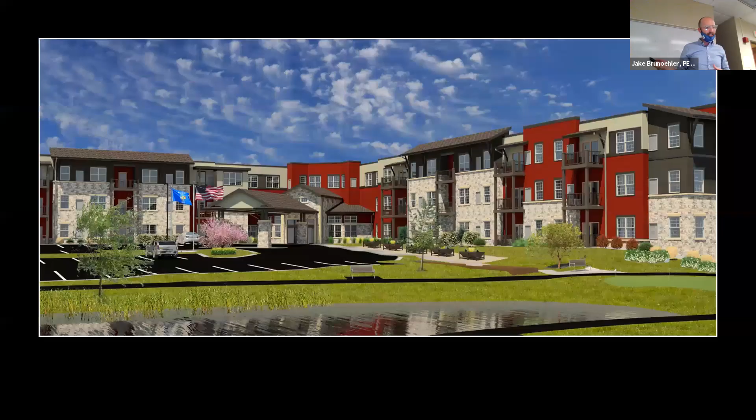So he's all about blue mind, the benefits of being in or on water. And so that's where the blue marble comes from. So for those who are interested in stormwater or environmental engineering, or just an interesting read, I do recommend his book called Blue Mind. In that story, he accurately describes all the physical, ecological, economic, cognitive, emotional, psychological, and social benefits of healthy oceans and waterways.

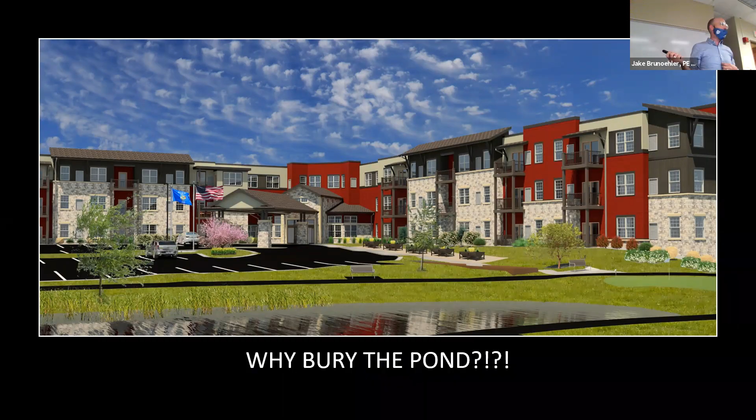And so if there's such a direct correlation between our personal and societal well-being and being on or near water, why would we ever want to bury the pond? It just doesn't make sense, right? And so we're going to go through the why real quick. As I always say, when we start with why, I'll say safety first. So that's where we'll start.

As I said, I work predominantly on subsurface stormwater management. So everything I do gets buried. And a very large number of projects that I work on, say schools and things like that, might actually have the space for a surface pond, for stormwater to be stored at the surface, but due to the potential for someone to get into that pond and find harm, they, and likely their insurance carrier, are not interested in having the pond at the surface on their property.

Schools, childcare facilities, senior and memory care facilities. Even now I hear discussions from neighborhood associations that have concern over how much liability is shared by the residents who all send their runoff into a regional pond in that neighborhood. Is a sign enough to protect yourself from the liability of someone finding harm in that pond? Do you have to fence it like a pool? How big of a fence? And does it need to be lit at night?

I myself, and probably all of you that have any education in stormwater, am pretty grossed out about the thought of swimming in a stormwater pond. Like, ugh, gross. But I know with my toddler, he turns 2 next month, if he had wandered away out of my house to a pond, unless he is physically incapable of getting to the water's edge, he's going in. He's going to investigate. And so that just scares the living daylights out of me.

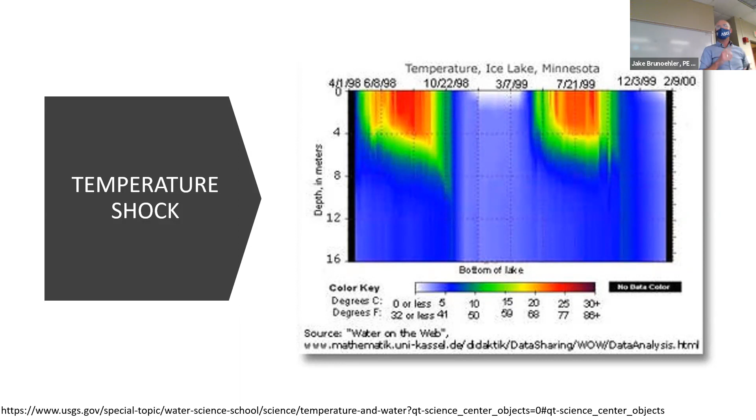In natural environments, temperature is really not too much of a concern, as those aquatic species have evolved to exist in those natural water bodies. It's when the temperature of that water body changes, either by a natural event or by human activity, that those fish start to break out in a sweat and get a little bit worried.

So our ponds, let's see, oh, there we go. There's a photo of a nice steamy parking lot right after a summer rain. Our ponds are meant to accept, store, and treat rain as it comes off parking lots just like this. So rain falls on a parking lot that's been baking in the sun all day.

And for those who have tested asphalt, like I did through college, you can put your hand on asphalt up to about 125 degrees. And if you can't put your hand on it, you're north of 125 degrees. Anything that lands on that parking lot surface, that's hot.

And so the water that falls on that parking lot gets superheated and then runs off into our ponds and streams. And if that water is not returned to a more normal temperature prior to entering natural downstream systems, that water can be a pretty severe shock to those aquatic life species.

So taking that water underground first, even just temporarily, into an uninhabited place where animals aren't living, a spot where they are not currently taking up residence, to allow it to cool off away from that flora and fauna can really significantly mitigate the risk of the heat shock.

And then next on our list of reasons: I'm certainly not a real estate expert. When it came to purchasing a home, I let my wife drive that, so she's more of the specialist on that. But I think everyone has heard of the three most important things in real estate. It's location, location, and then location.

The pictured example on the screen is of the church that I attended when I lived in Milwaukee, right here at the corner of First and North. St. Marcus Lutheran Church has been an incredibly successful school right in the Brewers Hill and Harambee neighborhoods. And if you ever look it up, those are some pretty gnarly neighborhoods as far as the statistics you might look into for neighborhood metrics. It's not the prettiest of pictures, but through serious commitment and dedication, this school has continued to grow.

As part of that, they've been doing campus expansions, just like Platteville's doing a big giant expansion I got to tour last week. Awesome projects. St. Marcus was doing the same thing back in 2010. The school was on the doorstep of breaking ground when the local city governing authority came in and said, if you continue to build this, you have to install some sort of stormwater management. You cannot continue to ride this grandfathered train without making some sort of change to your stormwater management. They were basically just sending it right into the combined sewers.

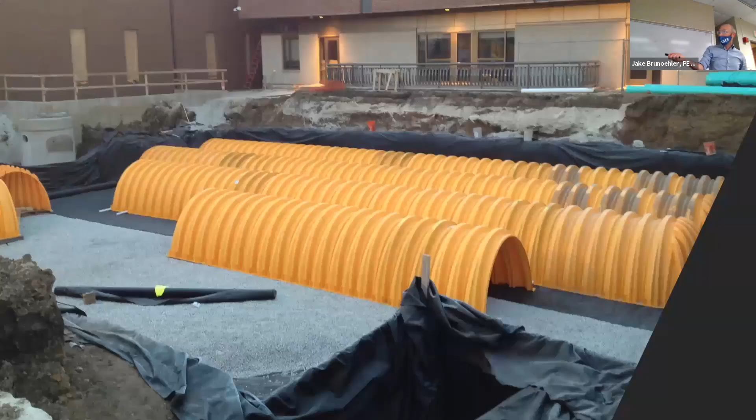After a few quick calculations, it became clear that the portion you see here on the screen, which is a very nice playground, would either have to be a surface pond, or they would have to bury their stormwater under this playground. Everywhere else on that property is built, and there was no room left. Even though it was well before my time with ADS, I was able to track down construction photos. Right here, that is the stormwater system buried underneath, about halfway built. Those are the stormwater chambers that I work with now. So it looks like this now, and that's what it looked like while it was being built.

So they weren't really given much of a choice: bury their pond, move to a different facility, or limit their enrollment, which to this day is still perpetually on a waiting list. They weren't left with much of a choice. So all that stormwater got buried under their playground.

And one of the more favorable items about many of these buried systems is that many of them are made with post-consumer plastics. Both my products, and several other ones out there. Anytime you can increase demand for those post-consumer plastics, as demand goes up, the price will follow, right along those economic principles, if you take macroeconomics as part of your curriculum.

No. Yeah, we took it at Valpo. I'm not sure it's a great class. I barely use it now.

Anyway, this massive demand increases the potential revenue to those municipalities that institute recycling programs. As the programs are better funded, they get better at their job, which increases the quality and efficiency to keep those plastics out of landfills. There's this myth out there you've maybe heard: oh man, nobody buys those plastics anyway, it all just goes to the landfill.

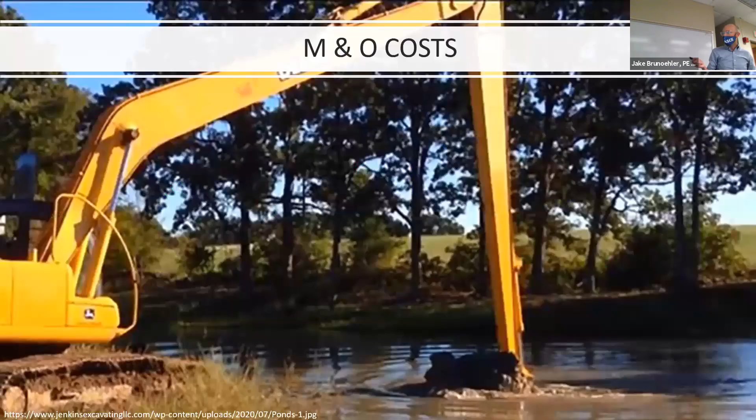There we go. The next one is a trend that's starting to pop up in the early adopter states with more robust stormwater programs. That photo right there was taken in Minnesota. So the reason we do stormwater at kind of a micro level, you've all heard of the Clean Water Act, I assume. The state of Wisconsin is mandated by the Clean Water Act from the feds, from the EPA, to institute stormwater programs to clean up our rivers and streams.

As part of that, about 30 years ago, Minnesota was one of the first early adopters of the Clean Water Act. Minnesota has some of the oldest ponds in the country. And many of these ponds have long since reached their maintenance cycle, where 30 years is about the life cycle of a pond that's been designed properly. And as they reach their maintenance cycle, they've really ceased to do their job. They're not really functioning anymore.

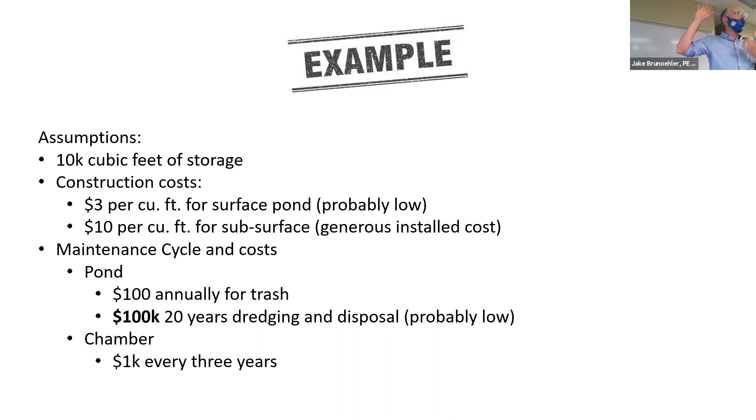So, hold on. Yeah. Any questions up to this point? Let me just pause right there. I went through a lot of information. Stormwater students in the room. Do you declare an emphasis, a focus? Environmental emphasis. Okay, cool. Sweet. Right.

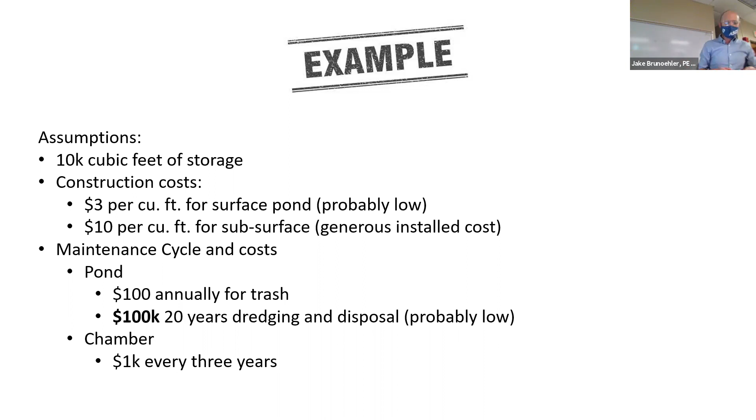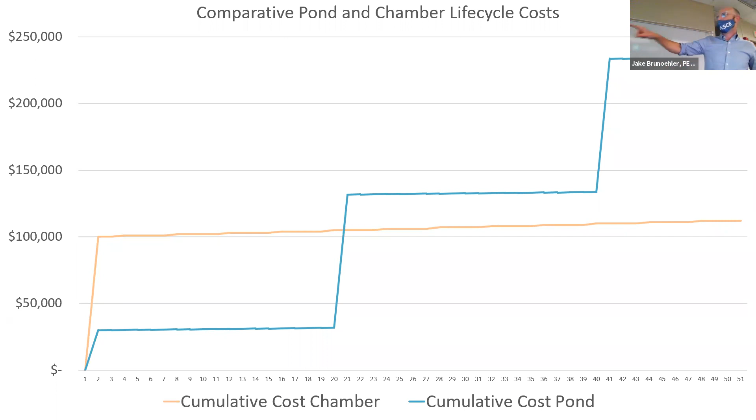So I'll actually go through a quick cost comparison of underground system maintenance versus surface level stormwater pond maintenance. So on your screen, based on the chart, I'm just gonna skip that. It's at this point when we start to transition out of the why. We covered why we might want to bury the pond. Now let's get into how. And depending on whether you're talking with a developer, an engineer, or a regulator that's got oversight, you might be asking yourself, what if I already have it?

What if I'm not quite ready to turn my property into a construction zone yet? I already own my pond. What do I do now? I will say that many municipalities have begun to retrofit some of their ponds with upstream pretreatment. Actually, on my way into the building, there's a catch basin right outside with a coarse settling device built into that manhole. So there's a pollutant removal device right inside the unit, right outside the engineering building.

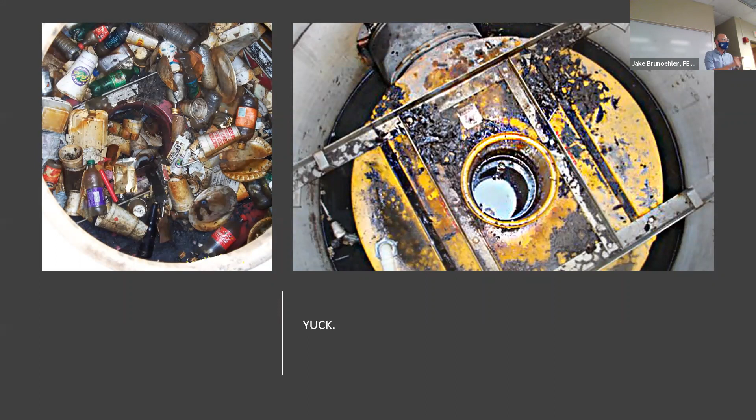So at the last catch basin or manhole prior to a pond, just like the one outside, they install a much more effective water quality unit to keep a lot of that sediment from ever reaching the pond. So it allows you to clean out your manholes and catch basins on a fairly regular basis, and then you get that ounce of prevention versus that pound of cure. These units typically have much easier access for regular scheduled maintenance and cleaning, and much more minor disposal costs without having to do a full pond dewatering.

If you've ever seen how a pond gets cleaned out, they basically empty the entire pond of the water, and they pump all that water through big filter bags. Once all the water's through the filter bag, there's a bunch of dirt left in that bag, and they have to haul all that dirt off, all that sediment, trash, leaves, decaying animals, all kinds of things. So that is a significant cost. So if you can mitigate the number of times that might happen,

The one on your screen is a pre-treatment unit, and it really shows how dirty stormwater is. Stormwater is gross, guys, if you didn't know. We get it in such concentrations we don't realize. This one happens to be from a company called Hydro International, and the model on your screen is called a Downstream Defender. The Downstream Defender is usually in a 4, 6, or 8 foot diameter manhole.

With the inlet and outlet configuration, the water comes in from the outside and enters the manhole so that it starts swirling inside. With the swirling action inside that manhole, the water's in there longer, which allows for more sedimentation, so the sediments can drop out of that water. On top of that, it's got an internal cone that keeps floatables from discharging from the unit as well. So really just a pollutant removal device they can install right in front of the pond. Pre-treatment systems typically target pollutants in the 50 micron range and above.

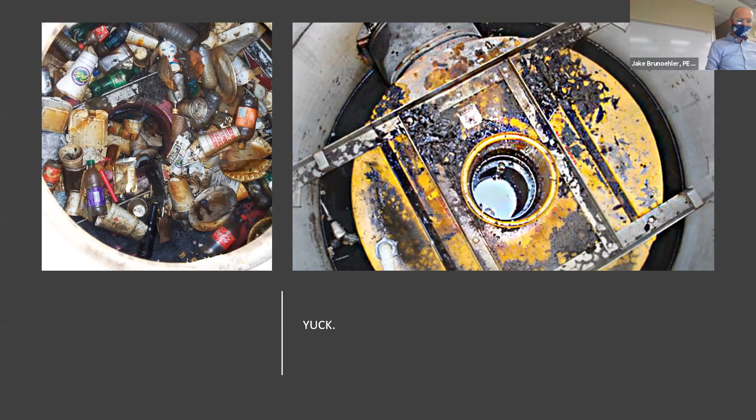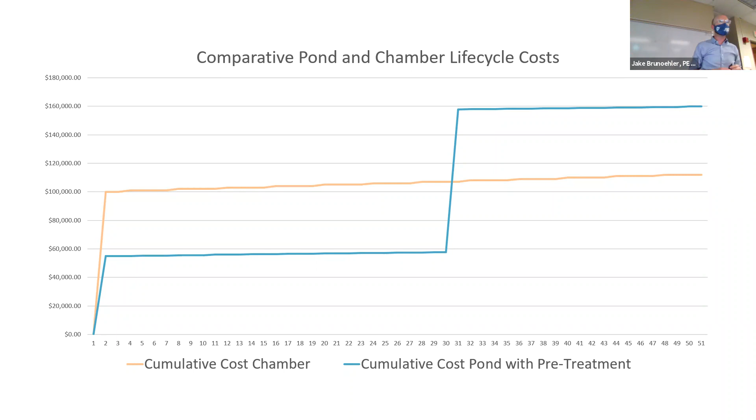So if you're able to add that to your upstream storm sewer costs and eliminate one dredging and disposal, even with regular cleaning costs, the overall savings in the life cycle of a BMP can be pretty significant. Right here, this blue line is the cost of ownership for a pond. Even though nothing's cheaper than digging a hole in the ground and putting water in it, once you have to do it again about 15, 20, 30 years later, suddenly the cost can be pretty significant. You get a lot of initial cost in building that stormwater system, but by the 30-year or 50-year life cycle, those costs have leveled. So just a different way to think about it.

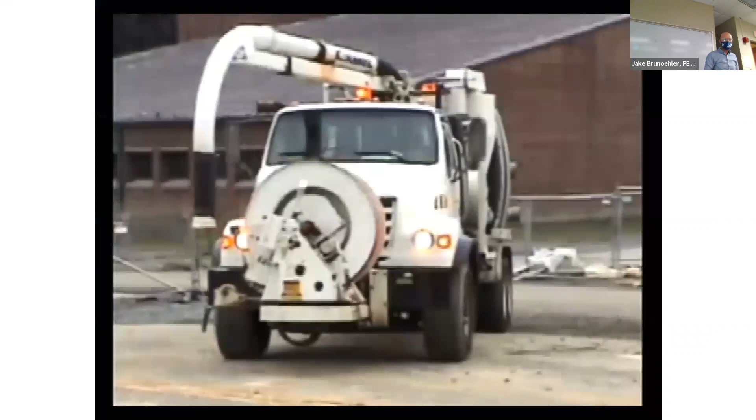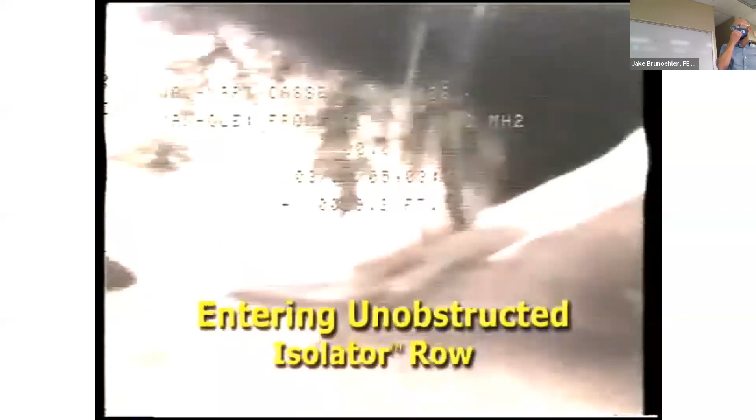While we're on that subject, we'll talk a little bit about what maintenance might look like on an underground system. Once those pollutants are contained within an underground pond, a lot of those get cleaned out with a jet vac process. Forgive me how old this video is. Not a lot of my systems have reached their design life cycle for maintenance, they aren't old enough yet to need to be cleaned, so this is the one that I've got.

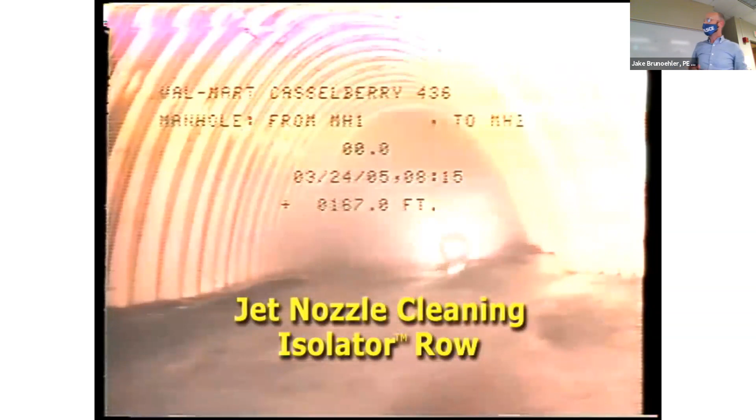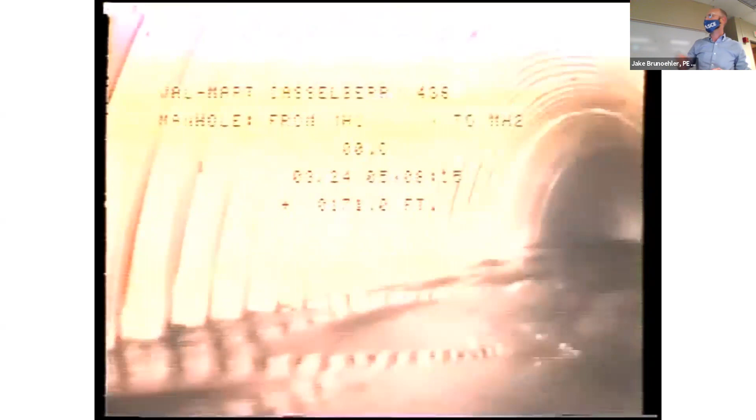As you can see, the jet vac actually goes into a stormwater system. All this sediment's built up on the bottom, and all that gets jetted back to a cleanout structure on the end of that stormwater system. This is an underground stormwater storage and treatment system, and it also promotes infiltration. It's an underground chamber system, just like you saw at that church project. We'll go into some different project examples closer to the end.

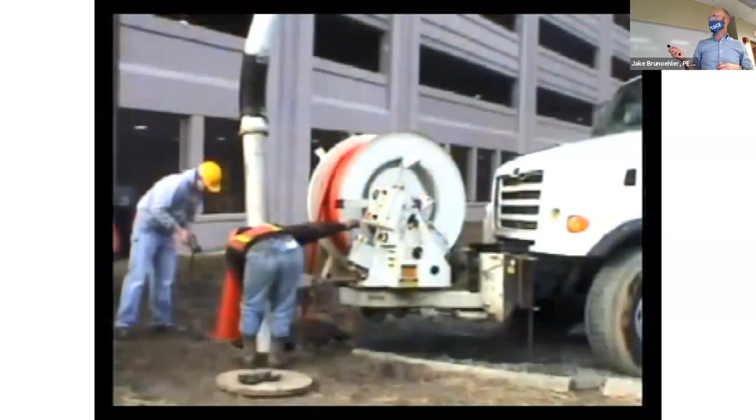And then this right here, also further illustrating how dirty stormwater is. Any construction management students in the room? Any CM students? Right, nice.

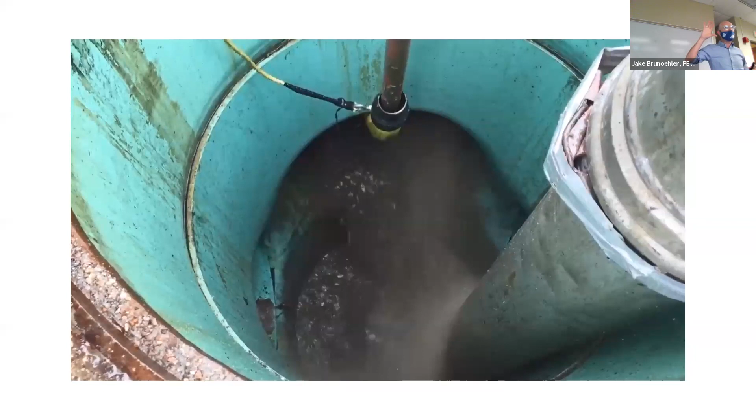So this stormwater system went live. So they basically hooked up all their storm sewer during construction to their post-construction stormwater devices. So during construction, you use like inlet protections, silt fence, all that stuff you see around the engineering building right now for erosion control. They didn't have any of that in. They just sent it to this system. And since this removes sediment, removes pollutants, it did its job, but it also saw about 20 years worth of sediment in about 6 months.

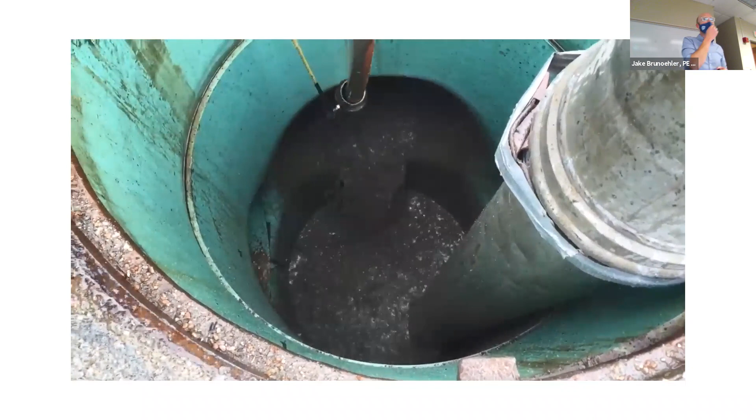I have the 3 classic pillars of sustainability on the screen. You probably have all heard of this, like the whole sustainability. Yeah. So especially with ASCE now coming out with a sustainable design manual, the ASCE, I think it's 144. ASCE 7 is for like structure. Yeah. Anyway, when it comes to the first 2 pillars, most subsurface systems do shine. It makes good environmental sense, makes pretty good economic sense, especially when you consider the cost of real estate.

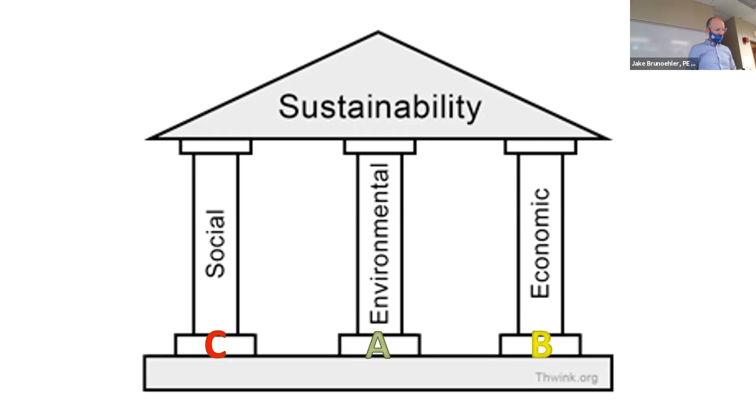Which kind of brings me to my last two parts. A few examples, and then we might go through a couple of designs.

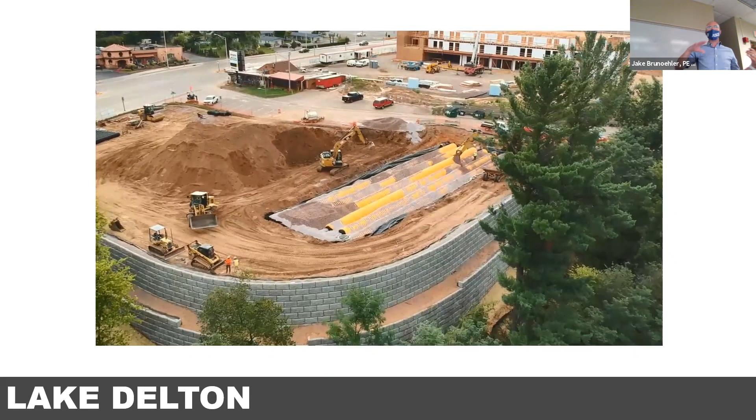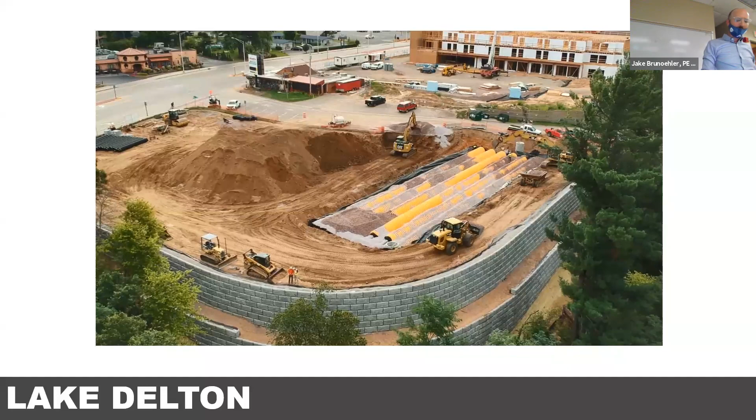But I will take this opportunity to reiterate and disclose that I do have a financial incentive towards buried stormwater systems. Obviously, that's clear. I'm pretty enthusiastic about it myself. I am paid by a manufacturer that produces construction materials for that exact application. So please understand that there are many companies out there that also produce proprietary products that can be used for this application.

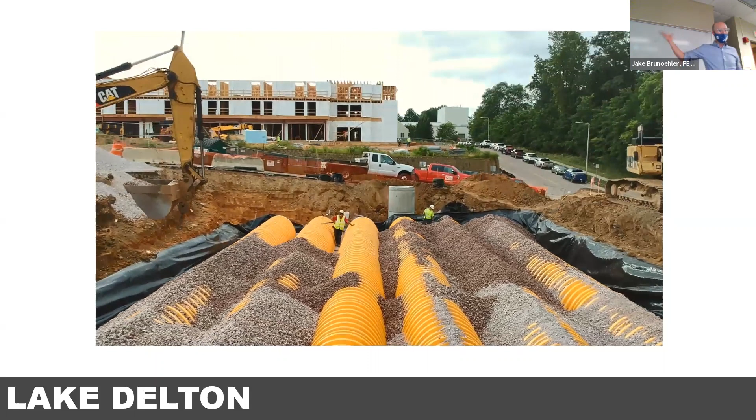The overwhelming majority of underground stormwater systems are proprietary devices, just by nature of what it's trying to do: finding a way to structurally bury your pond under some sort of much more usable infrastructure. Fortunately, most of these systems can be specified with non-proprietary specifications. So when you're writing specifications for, say, public projects that are funded by tax dollars, there are ways that you can specify those proprietary systems with non-proprietary specifications. So it's all about how you write those specs.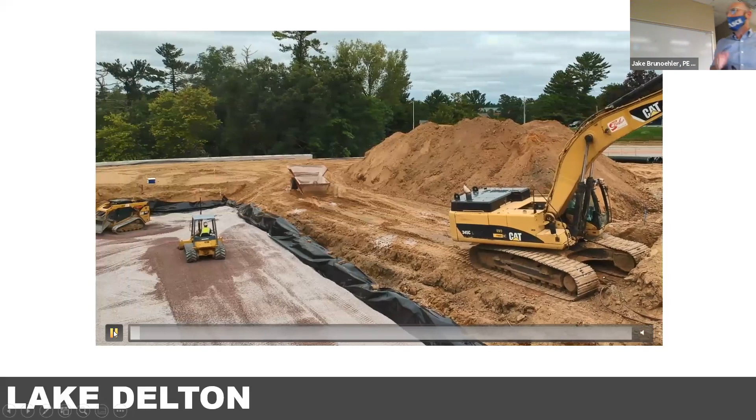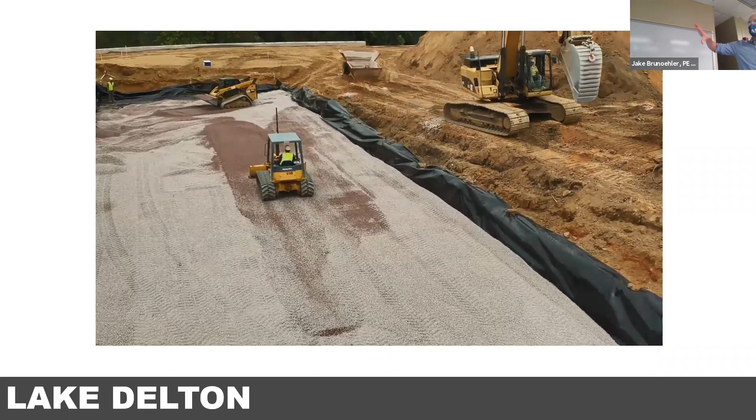So I'm going to play that one more time. This stormwater system is installed at a hotel, right in Lake Delton, a restaurant hotel site where they actually needed stormwater storage for treatment and detention and rate control. So they needed to hold that water back. And so right under their parking lot, and the interesting part about this one, if you see along that left edge, there's a pretty big retaining wall. So storing your stormwater right next to a retaining wall is a pretty bold move too.

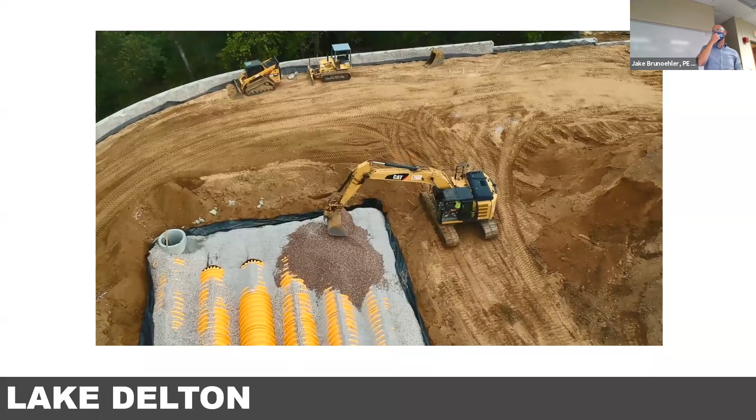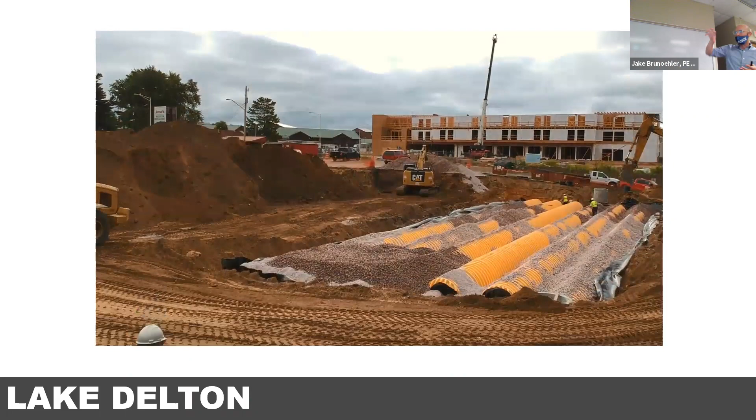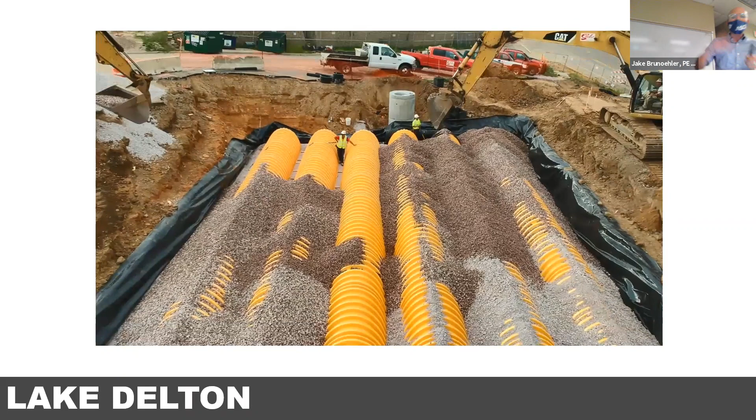So that one actually had a full impermeable liner around the bottom of it, because that stormwater system is open bottom. So we use the storage in the rock as well as the storage inside that underground chamber for that StormTech system. So we had to do a full impermeable liner on that to mitigate risk to the retaining wall. Neat project, and construction always looks better from a drone than it does from down at the surface.

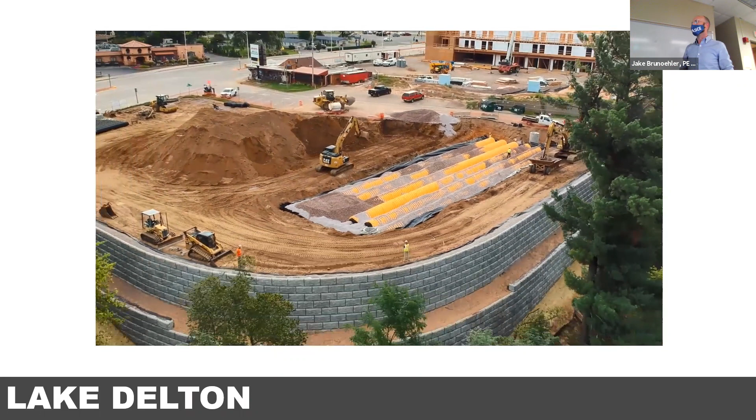It also helped that the contractor was really clean and really professional. So I'll give a shout out to that contractor as well.

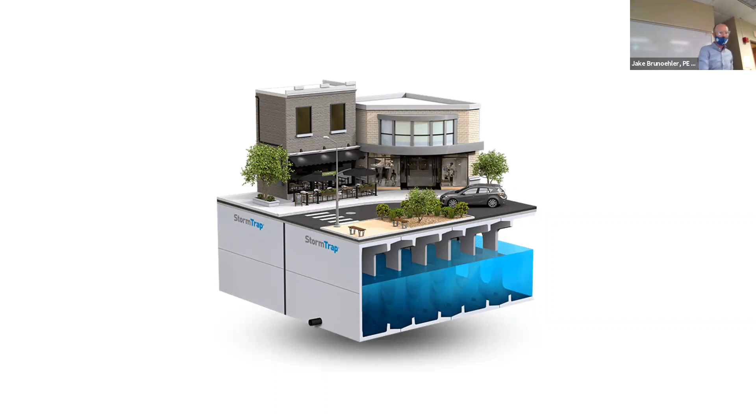As I say, there are some good stormwater systems out there. There are some not so good ones. The one pictured right here is called StormTrap. The one that I work with is called StormTech. I know, not confusing at all. StormTech is from ADS. It's an underground thermoplastic chamber system. StormTrap, as you can see on your screen, is actually made of precast concrete. It's basically like building a basement, and then you can send stormwater.

Concrete vaults with modular systems that can be configured to meet some of the most challenging urban projects. We see a lot of this product line down in Chicago, because a lot of times you're not really supposed to put stormwater systems under the footprint of a building with permanent occupancy. So if there's residential units, they're not really supposed to put it directly under that. So they try and find a spot, say in parking lots or parks or playgrounds, where they can put those stormwater systems. But it just kind of looks wild, right? Like someone messed up and flooded their basement is what this looks like.

So StormTrap's a good product. I know their local Midwestern rep really well, and that's a good friend of mine. So he and I get along real well.

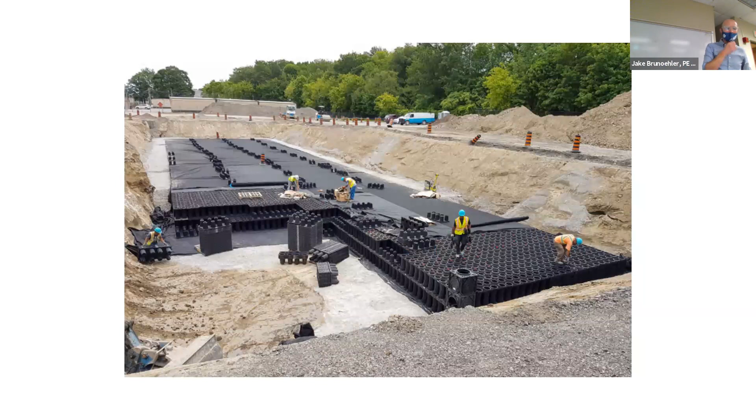Another system that we see a lot of, depending on what part of the country you're located in, is often referred to as a crate system. I believe it's due to their similar look to an actual milk crate. So right there, going after the hearts and minds of the dairy state with milk crates. These modular interlocking crates are typically made of high density polyethylene, just like a lot of the products that my company works with, which is again a benefit. They can use recycled thermoplastics to provide storage volume needed to meet those detention requirements as part of their stormwater.

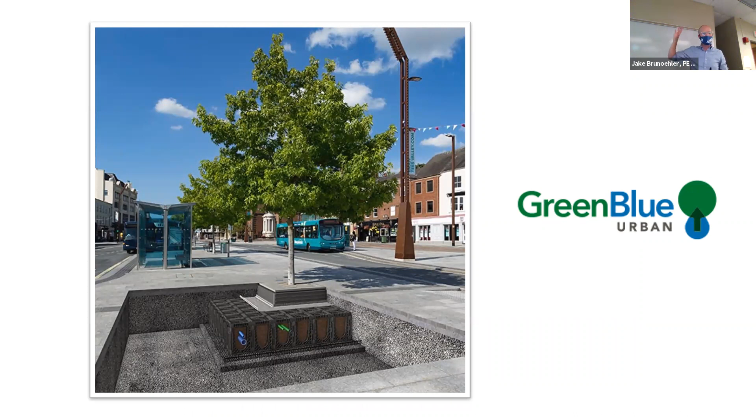And one of the more interesting ones that's popped up on occasion, just starting to get some momentum, is projects all over the country from a company called GreenBlue. Most urban trees, the trees that you see planted in downtown areas, are planted in a box that's maybe 5-6 feet square, which is really like a little tree coffin, where that tree is going to grow and provide this really nice canopy, but it's going to be root bound in maybe a decade. And at that point, it's going to just limp through and probably die.

And so GreenBlue has developed a structurally viable way to create space for a much larger and more healthy root ball without risking major damage to the surrounding infrastructure. So right in the middle of your downtown streets, they've created a crate system that allows for loose soils under the road, which then gives room for those root balls to expand.

At that point, the amount of benefits from a tree versus, say, green infrastructure with small shrubs, small shrubs that you see in a rain garden or a biofilter. Trees are workhorses. You get stormwater uptake through the root systems, you get evapotranspiration from the water that's on the leaves, you get CO2 usage in much greater quantities. And there's probably more that I'm forgetting.

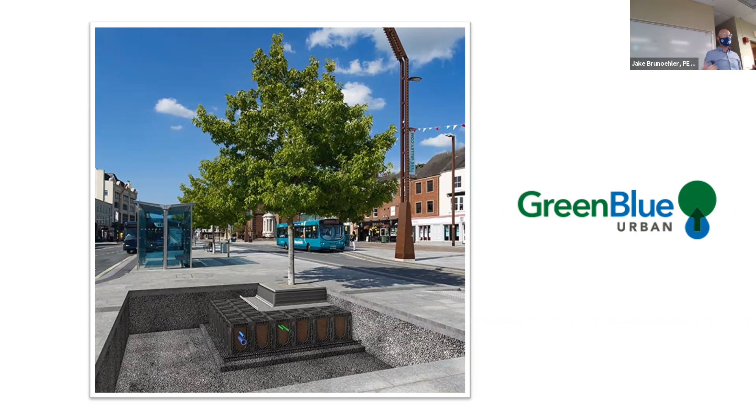But a really neat product that my company doesn't do. So with good autumn leaf management, especially as the leaves fall, you don't want those leaves to then create a concentrated phosphorus load downstream. I can't imagine how these devices won't do good things in dense urban settings. So it mitigates temperature, you get a cooler downtown because you're in the shade. There's just a neat product. I enjoy talking about some of the ones that are more exciting.

Many times these and other underground systems do require a lot of ancillary treatment. So there's really neat ways that you can combine all sorts of systems together in order to provide more sedimentation in a treatment train approach. So the water quality provided by the energy dissipation from permeable paver systems, which causes those pollutants to settle out, can be matched with all kinds of options, each with their different costs and associated performance.

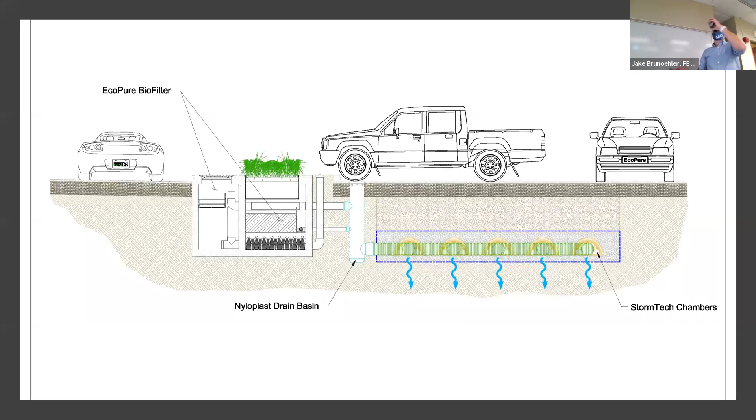And then I've also had the opportunity and the fun experience of working with permeable paver manufacturers from companies like Pave Drain, where they take permeable paver blocks and we'll actually use those as how water gets into our StormTech chamber system. So underground chamber systems with a permeable paver block at the top, at that point you don't need storm sewer to get into the system. It mitigates a lot of costs that way, but you also get the pre-treatment and some of the flow attenuation from the permeable paver blocks at the surface.

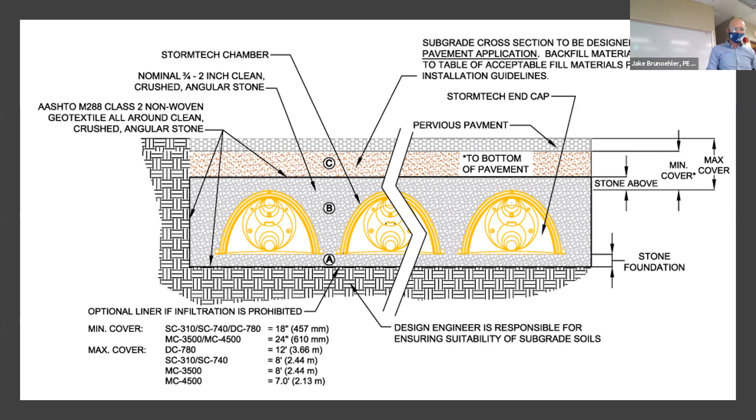So neat design methodologies, and why we all kind of have to get along together as manufacturers, because we might only have a portion of the project that comes from our employers. So we kind of have to partner with our competitors all the time. So, yeah, and same with combination systems with bioretention, biofiltration, more of your classic green infrastructure. So this example on your screen there, you see right here.

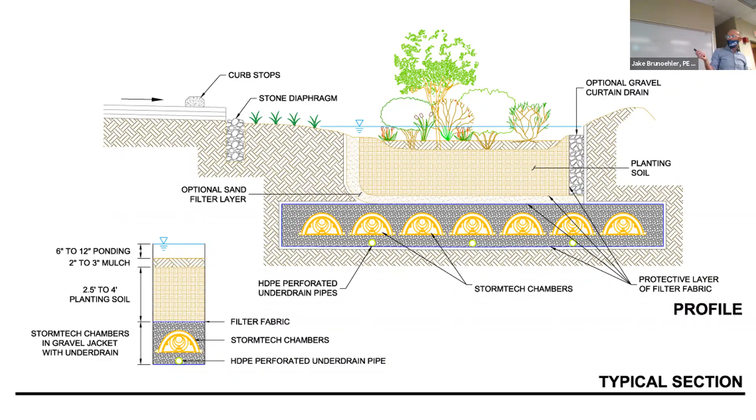So I'm going to go through an example project. Here we go. One of my favorite example projects across the state, for anyone from Southeast Wisconsin, near Delafield, Commonwealth. Yeah, sweet. So there is a small restaurant with a red label. They make sandwiches with chicken. That's probably the end of it.

So right near the Highway 83 exit, this was the parcel prior to construction where the dry pond for the entire rest of the 14-acre development was being stored in this last parcel. And that restaurant really wanted to build right here. Normally a restaurant that size gets about a 2-acre property, and we'll say they need a stormwater management system this size. But because this parcel was where they were storing the stormwater for the entire rest of the development, they needed a stormwater system this size.

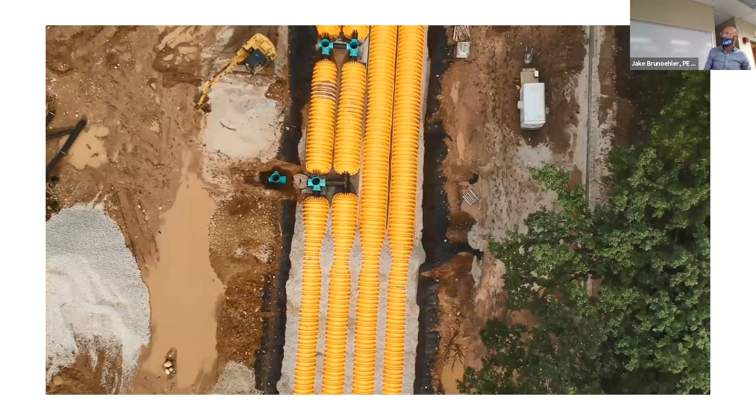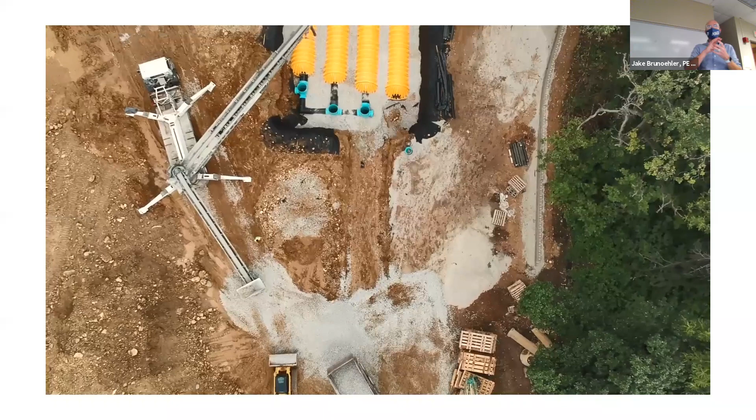And so underneath, here we go. There's aerial footage of that system going in the ground. You can see the excavator on the left-hand side, just to get a perspective on how big that system is. Right underneath that pond, they had to bury that pond. It was taking almost the entire parking lot, the entire surface of that entire parcel. If it wasn't the building, it was stormwater storage. So right under there.

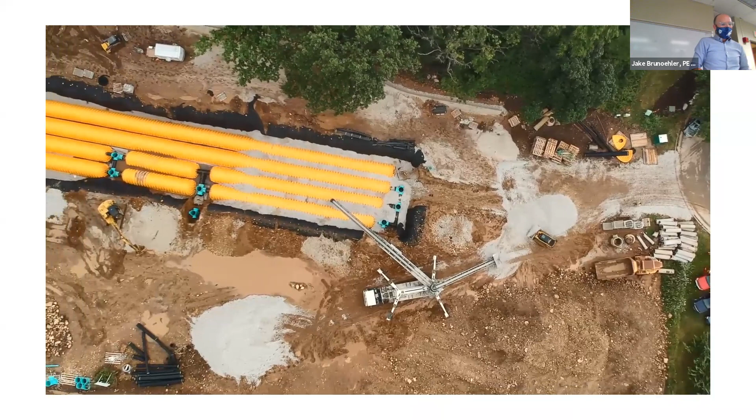So despite their stormwater cost being about 10 times what a normal chicken sandwich restaurant would need, it was the only way that they were going to be able to build on that spot.

And fortunately for them, it's in such a location that you can see it from Interstate 94 in time to take the exit. So as long as you go on any day but Sunday, you can then get your fix. Inevitably for me, I always forget. I always end up pulling into that place on Sunday. So I will say that it is one of my favorite clients to work with, to give you all a confidence to shop at those locations.

The chicken sandwich maker is one of my favorite developers. Yeah. For sure. Okay, I know exactly. Yep, for sure. I live right by it. Yeah. And so you'd never know that that's buried underneath the parking lot.

And what's really nice about that owner, and that owner nationally as well, is they really do want to do the right thing as far as their stormwater management systems go. They do want to do good maintenance and operation. They don't really care what it costs. They're going to do regular cleaning. They're going to do regular maintenance. They're going to spend the money to do their environmental stewardship right.

So not every developer, every owner you're going to run into is that way. So it's really refreshing when one of them, even one as big as that one, really gets it. So other ones in that same genre, large warehouse that sells the bulk stuff.

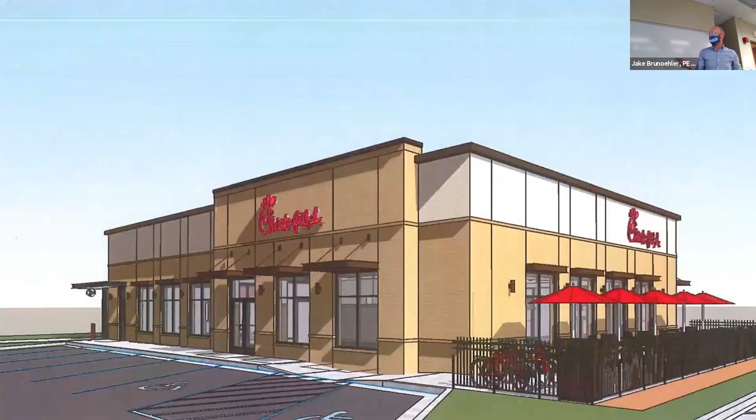That's not really all that anonymous. Sorry. But yeah. So oh shoot, yeah. Whoops. Yeah, that was nice.

So the other last kind of underground device that I'm gonna talk about real quick, and projects that I've gotten to work on a little bit, rainwater cisterns. So anybody heard of rainwater harvesting? You're taking that rainwater? Yeah, for sure. So a trend that I'm starting to see a little bit more of here in Wisconsin. There we go. So our pipe and chamber systems are used for storage. But then what's really neat is some owners, if they're smart, they're able to institute rainwater harvesting into their development, into their project.

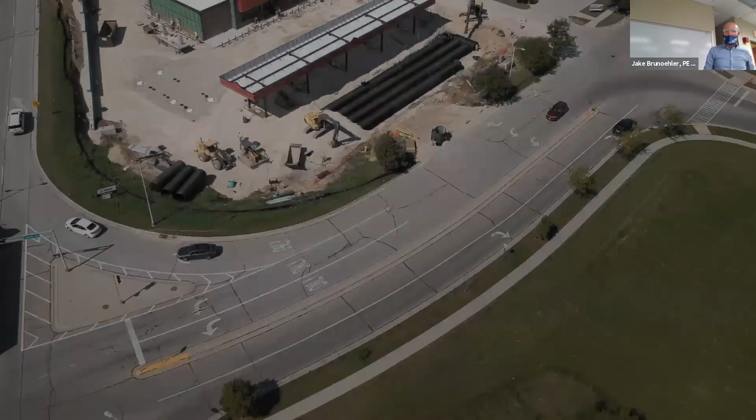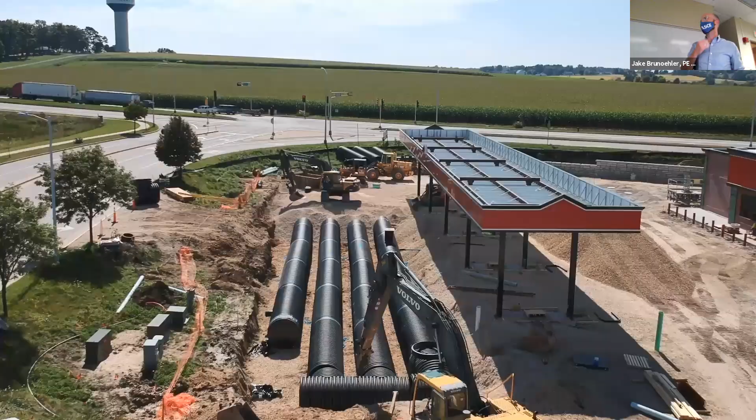Anyway, stop mumbling. So here's an aerial footage of what some of those rainwater harvesting systems might look like. This one didn't end up finding enough of a use of the rainwater to pump it back into the building. So they ended up just using that pipe system, that cistern, as a water quality device. There's a permanent pool that stays inside those pipes to allow for sedimentation. But that's kind of what it would look like from an aerial point of view, what those cistern systems might

look like. So just the black corrugated plastic pipe there, that's kind of my company's flagship product, used for a wide variety of different applications, anywhere from stormwater conveyance and storage to Tough Mudder obstacles. So with that, I'll jump into a summary.

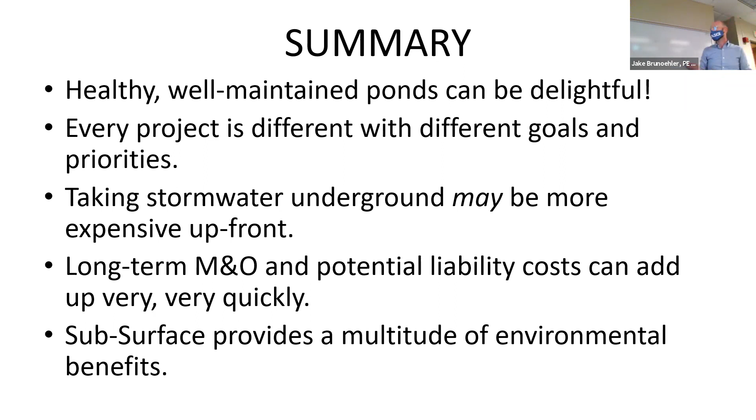So ponds, when they're healthy, are awesome. They're terrible when they're not. Underground systems can be a great option, and I work with them all over the state. It's a neat thing to do that I never thought I would do when I graduated from Valpo. But with that, I'll open it up for questions.

My role here in Wisconsin is I work with a lot of consultants and future consultants just like yourselves to do education sessions just like this for continuing education, growing, and keeping your licensure up. So who's taking the FE already? And then do you guys get to take the PE before you graduate now? Is that a thing? No. Yeah, I didn't get to do that. I had to wait. I would have much rather taken it when I was still a student.